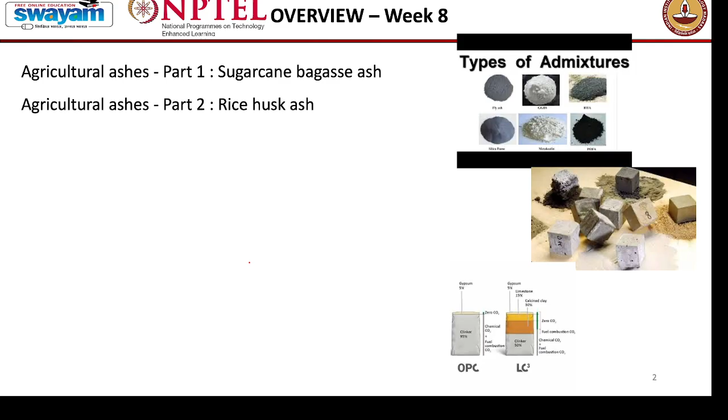We will also assess some properties of rice husk ash and their microstructural properties, and how they influence cement hydration. Then we will see some results from calorimetry, analyze the pore solution from this assay, and study CASH analysis in blended systems along with life cycle assessment analysis.

We will also see how these ashes make cement eco-friendly or reduce embedded CO2, and further study the life cycle assessment of concrete.

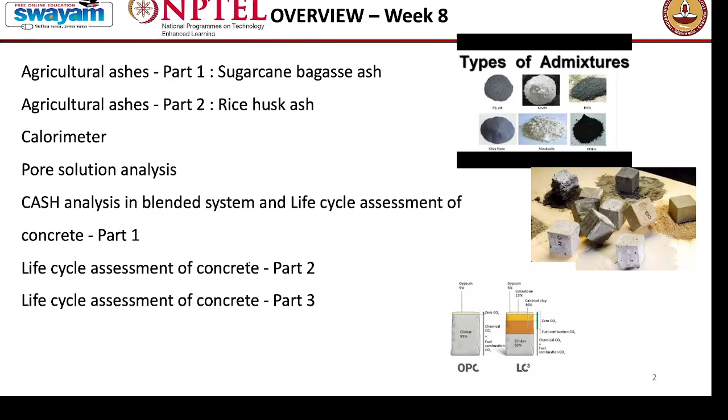Going forward, question number one: which process most contributes to CO2 emission in modern cement manufacturing? This is asked because we want to study life cycle cost analysis, and we know cement produces 8% of CO2 emission worldwide. But what is unavoidable, and what leads to the maximum contribution of CO2 emission from cement?

The first option is raw material transport, because transportation requires heavy vehicles which generate CO2 from their exhaust, needed in abundance to transport materials like clays and limestone to the cement plant.

The second option is clinker formation itself. After taking the raw material and feeding it to the clinkering process, calcination takes place at elevated temperature, which increases CO2, or alternatively it could be cement milling.

After clinkerization, we mill it to make it fine. Obviously more energy is required to mill it into a very fine material. So option C is cement milling.

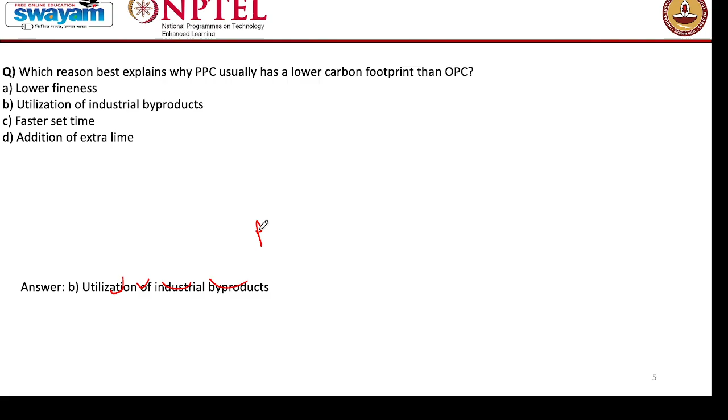Anyone with the answer? Let's see. The answer is utilization of industrial byproduct. As you know, PPC is made up of fly ash, and fly ash is a byproduct from thermal power plants, so we can consider its CO2 footprint as zero.

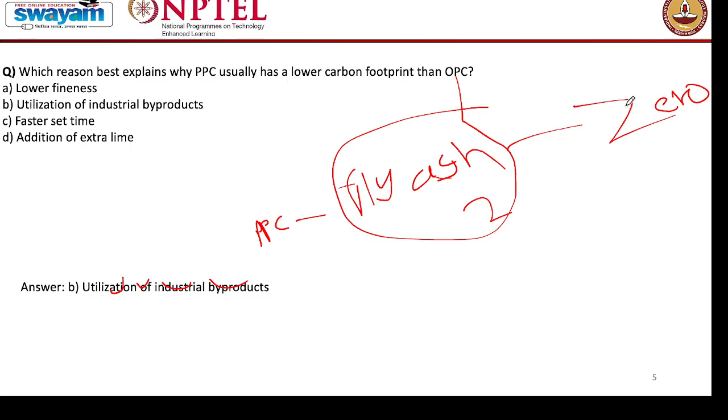So as we know, fly ash is the byproduct from thermal power plant which has zero CO2 footprint. When we use it in the OPC system to make PPC, the CO2 footprint is reduced because we are replacing part of the OPC with fly ash, whose CO2 footprint we consider as zero. Some CO2 footprint will still be associated with transporting the fly ash from the thermal power plant to a cement plant or grinding plant, but that will not be much. Hence, the main reason which best explains why PPC usually has a lower carbon footprint than OPC is utilization of industrial byproduct.

Okay, rice husk ash. Why does the porous silica structure result in a high surface area? The options are: enhanced crystalline phases, traps heavy metals, maintains porosity even in the coarser grains, increases alkali content.

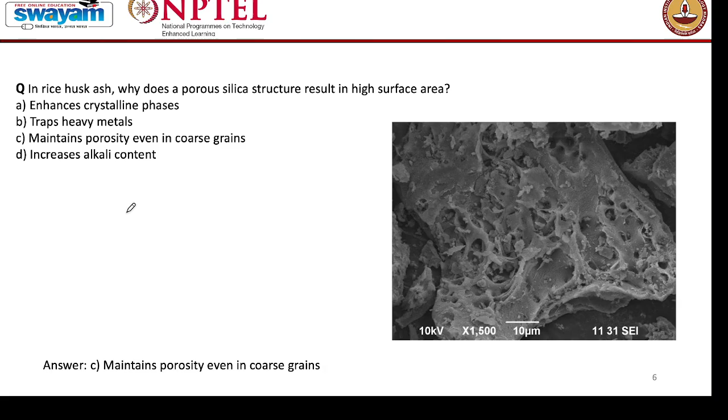So the porous structure leads to high surface area - why? Let's see the answer. It maintains porosity even at coarser grains. They're asking why the porous silica structure results in high surface area.

The property of rice husk ash is having porous structure. Because of porous structures present even in the coarser grains, the overall surface area of rice husk ash is of very high magnitude compared to other SCMs. You can see the structure also looks porous, so the surface area increases because there is area inside the structure as well.

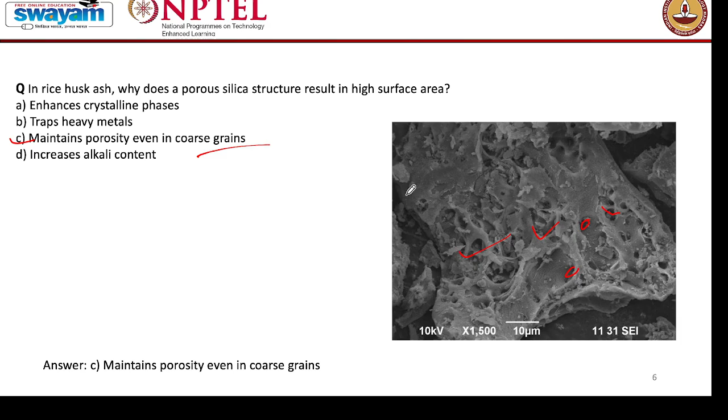Next question: what is the main consequence of excess carbon in SCBA used in cement? What is SCBA? Sugar cane bagasse ash. When we burn the bagasse generated from sugar cane mills, the leftover is ash, called sugar cane bagasse ash. It has some reactivity, so we can use it as a replacement to make cement, right?

Option A: accelerated setting, loss of color, reduced pozzolanic activity, high strength. What is the main consequence of excess carbon in SCBA used in cement? We will also study some of the consequences in the early setting characteristics.

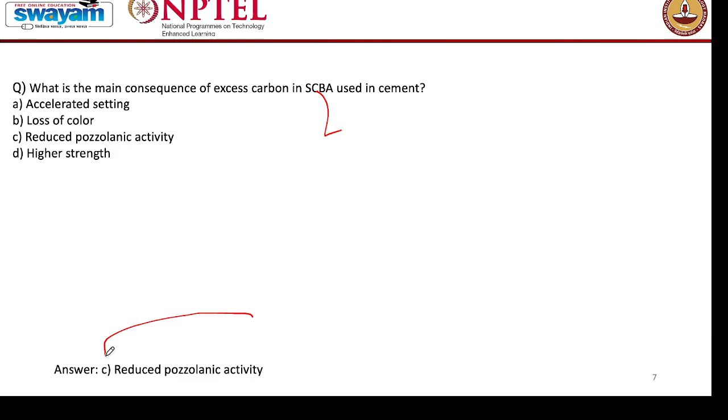Excess carbon means there is more organic compound present, which will hinder some of the early reactivity properties, or even interact with the superplasticizers we use, which could finally reduce pozzolanic activity. Because there is no reactive silica present and mostly excess carbon, it could hinder the pozzolanic activity and we will not get the desired strength.

The next question: which test monitors the cement setting by identifying the heat release during hydration? This is easy, will not take much time. Options: isothermal calorimetry, Le Chatelier, Vicat needle, Blaine fineness.

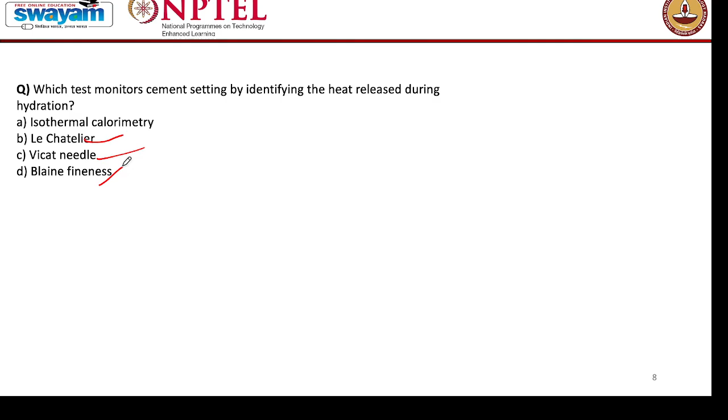Obviously, everyone knows that Vicat needle is used for initial setting and final setting time. Le Chatelier apparatus is used for unsoundness. Blaine fineness is used to calculate the fineness of cement. And isothermal calorimeter is the answer used to identify the heat release during hydration reaction over time.

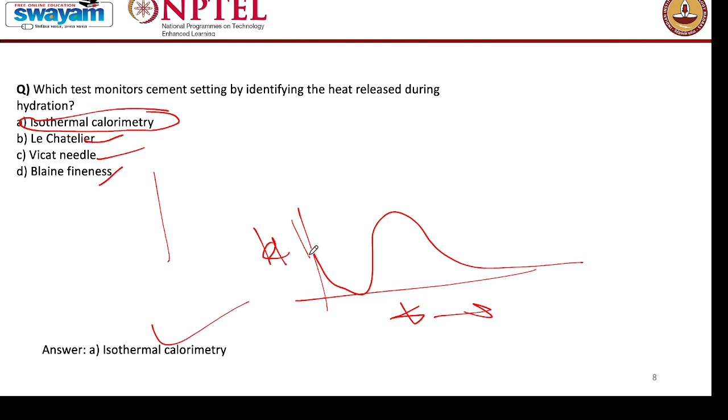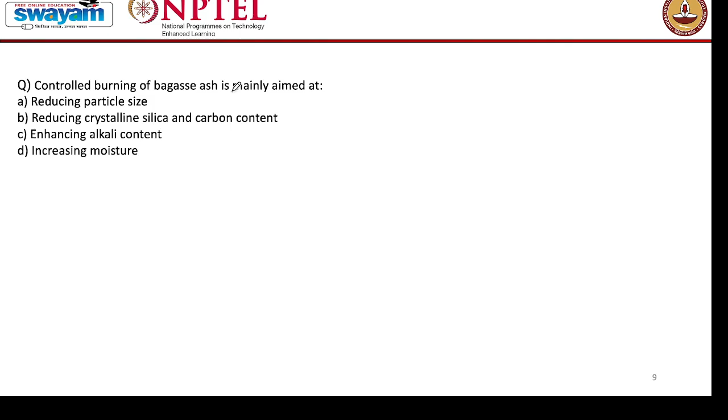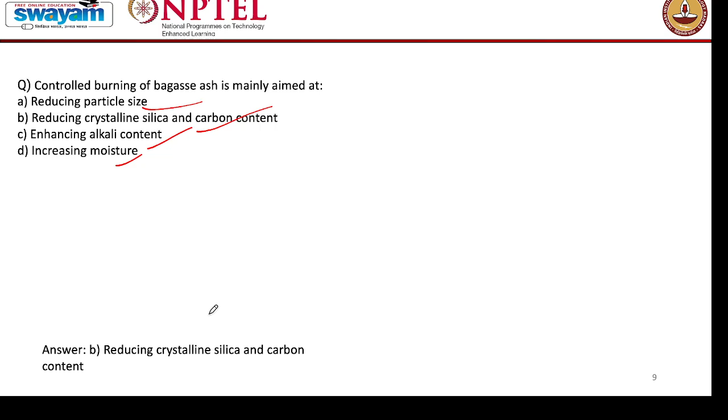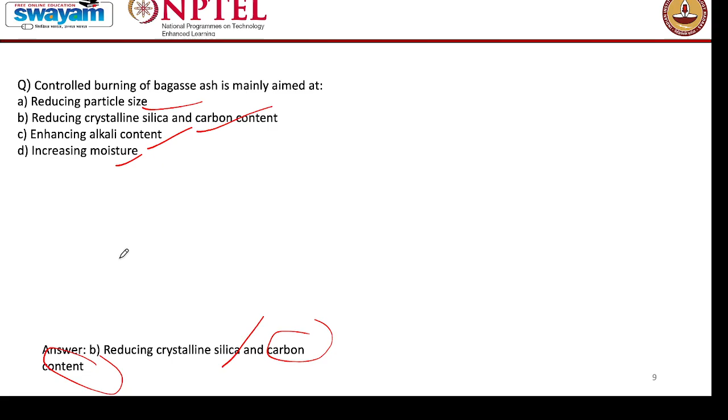So the next question is on why control burning of bagasse ash is mainly aimed at. Just now we said there is a problem of high organic compounds, which is carbon. The options are reducing particle size, reducing crystalline silica and carbon content, enhancing alkali content, or increasing moisture level. The answer is obvious: reducing crystalline silica and carbon content. That way we'll get good bagasse ash for production of concrete using it as an SCM.

What properties primarily limit the rice husk ash replacement level to about 20% in concrete? So there's a limit, why? Rice husk ash we can't use more than 20%. The options are excessive setting time, too much unreacted silica, high water demand, high shrinkage, or low thermal stability. Take your time for this and then we'll move forward to the next question.

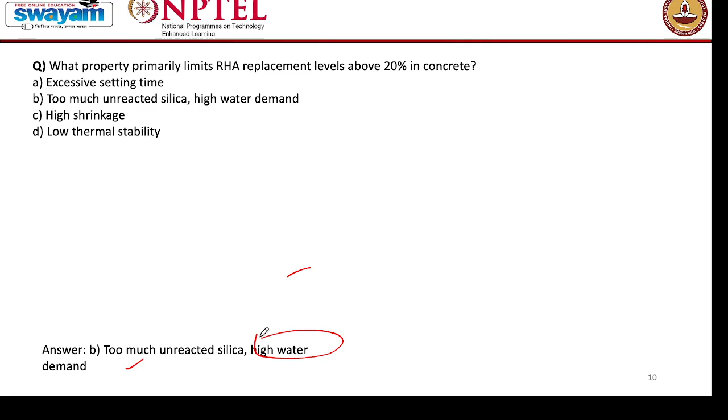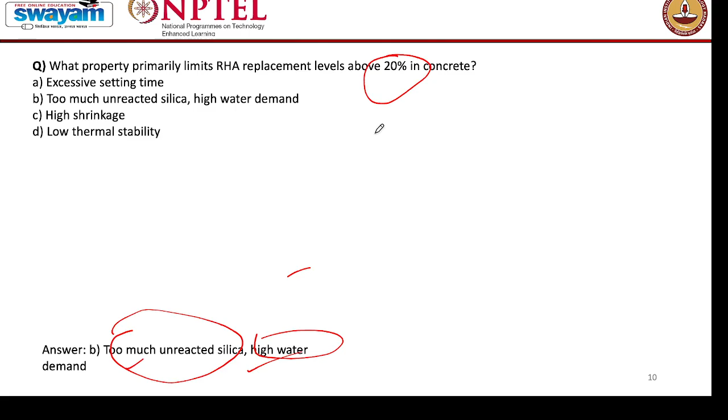Anybody with the answer? Okay let's see. The answer for this question is too much unreacted silica and high water demand, because the fineness and surface area of rice husk ash is very high due to its cellular, porous structure. Because of that there is a high demand of water that can't be met, and too much unreacted silica. That's why we can't use more than 20% in concrete, because it will take too much water.

So what are some sulfate resistant cements which you guys know? Slag-based cements are good in sulfate resistance. Also some of the new cements like CSAB cements and LC3 type of cement also show better resistance against sulfate attack, at least in laboratory testing.

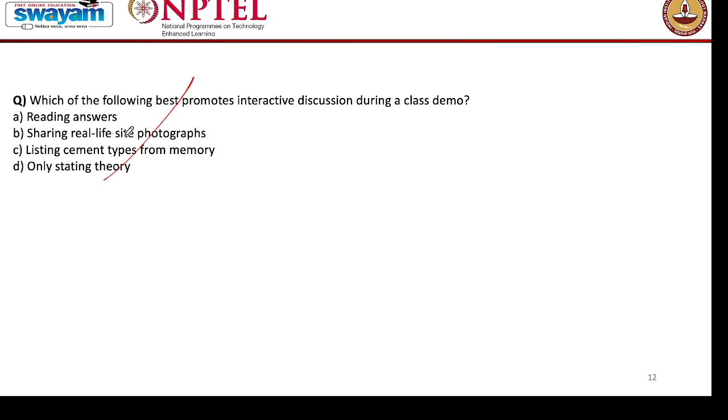The next question is on which one of the following best promotes interactive discussion during the class. Sorry, this is not the question from the content we are studying today.

Next question: which indicator reflects the sustainability of concrete design? Which are those indicators that reflect the sustainability of concrete? Options: apathy index, flashpoint, ratio of C3S to C2S, Blaine number.

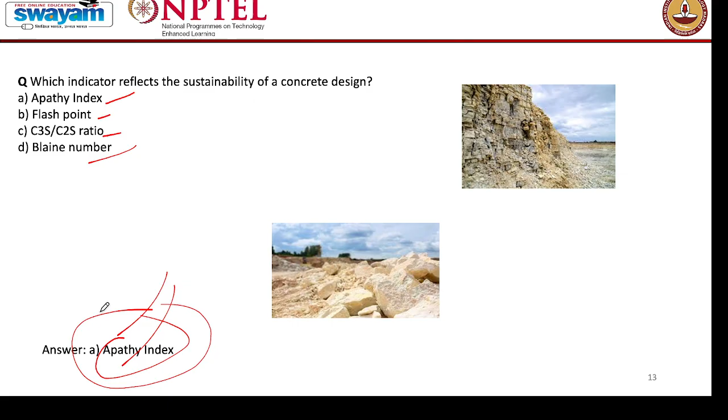This is a little tricky question, so we will not take much time, and we'll study here the apathy index, which determines how much CO2 is emitted per characteristic property with respect to durability or mechanical property. So this defines the sustainability characteristics of the cement. This index is used to characterize the sustainability of concrete, like how much CO2 it is introducing, how much durability it is providing, how much cost is associated, etc.

Next question is on what impact high alkali content in ash has on the cement system. Let's say you have some ash, for example from an industrial power plant or biomass ash coming from agriculture residues. If this has a high amount of alkalis, then what will happen? First option: accelerates the pozzolanic reaction, maybe true, because high alkalinity may create an environment of high reaction which will accelerate the pozzolanic reaction. Increases the risk of alkali aggregate reaction, ASR, could be possible. Improves color, decreases setting time, may also be possible, right?

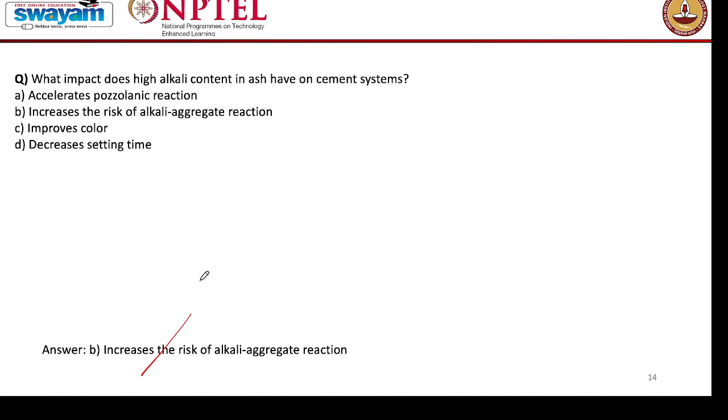But the main disadvantage of having high alkali content is increasing the risk of alkali aggregate reaction. We know that aggregates are not reactive and are inert material in concrete. However, when there is an increase in alkalinity of these binders and in the pore solution, they may react with the aggregate and lead to expansion stresses and bursting. That is not good for concrete, and concrete will have durability issues when there is a high amount of alkalis present. So we should always limit the amount of alkalis coming from the SCMs. How can we do that? There are some SCMs which promote the binding of these alkalis also, or the hydration product.

The nature of hydration product also influences the binding of alkalis, so they will not be easily available to react and form ASR. So we can study those characteristics of alkalis and how they are reacting to the cement concrete.

The next question is on which method best increases reactivity in low grade fly ash for blended cement. Low grade fly ash we want. Which method? Grinding, leaching, washing, blending with calcium sulfate. How to increase the reactivity of fly ash? Let's say you have fly ash with you, or you are using it, but you are not getting much reactivity. You want to increase the reactivity, but you don't want to invest a lot of energy in it.

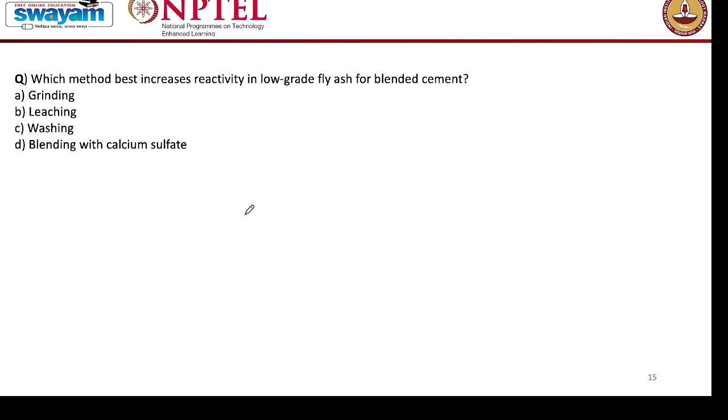We know that the more the surface area, the more the reactivity happens. So how to increase the surface area of fly ash? Can you think in that direction? Yes, of course. If you grind it, that will lead to increase in surface area. More surface area is available for reaction, leading to more hydration product formation, leading to increase in reactivity. Correct.

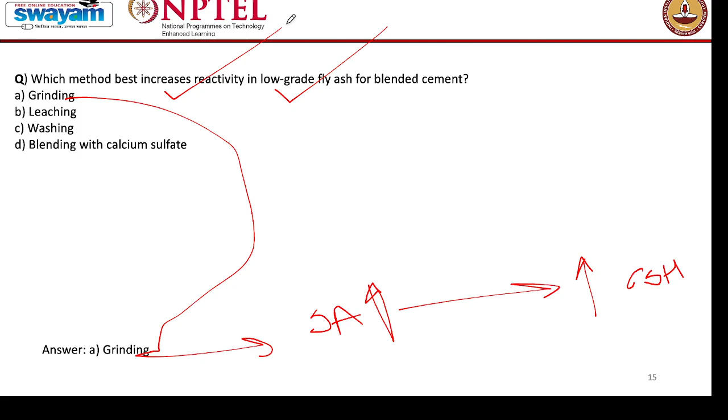The next question is, why does the LOI, loss on ignition, of RHA, which is rice husk ash, rise at very high calcination temperature? You know that there is a temperature limit above which, if you go, there is an increase in loss of ignition. What will happen? What is happening at the high temperature in rice husk ash? And do we need to provide that amount of high temperature? High potassium trapping unburned carbon, more moisture absorption, large particle size, high energy cooling.

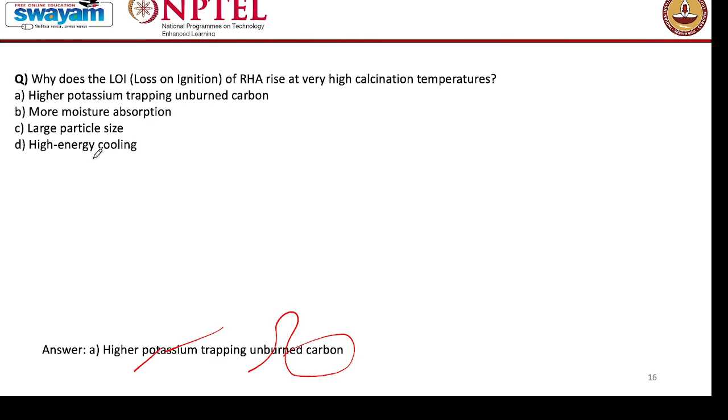Let's see the answer. So at the high elevated temperature, higher potassium is trapped in unburned carbon. That's why there is more loss of ignition. So that is also not desirable, to have a very high temperature, which could lead to very high loss of ignition in RHA.

The next question is, which cement type generally has the lowest embodied energy per tonne? Now everyone should answer this. Which cement type has the lowest embodied energy? Which is the cement that produces the lowest amount of CO2 into the environment? OPC, PSC, PPC, LC3. Take your time.

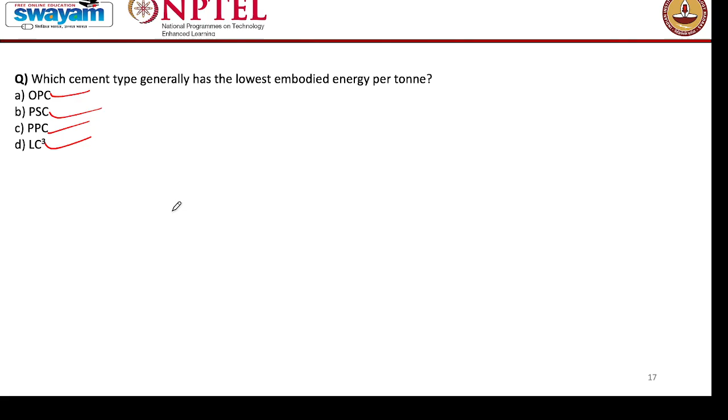Anyone with the answer? Okay, let's try to solve the answer. LC3. Why? Because in LC3 we have 45% replacement of clinker, which reduces the CO2 footprint drastically.

Then there is PSC. PSC also we replace by up to about 50%, which is slag. However, here the temperature requirement for production of LC2 is lower. And then, when we increase the PSC amount, the slag amount more than 50%, the CO2 footprint of PSC will become even less than LC3.

Fly ash is also a similar case. If we increase the amount of fly ash, that will have lower CO2 emission. Because in LC3, for LC2 production, some amount of heat is required, which also generates CO2. That's why this has to be carefully answered. However, the least one will have OPC, because it's using a lot of clinker.

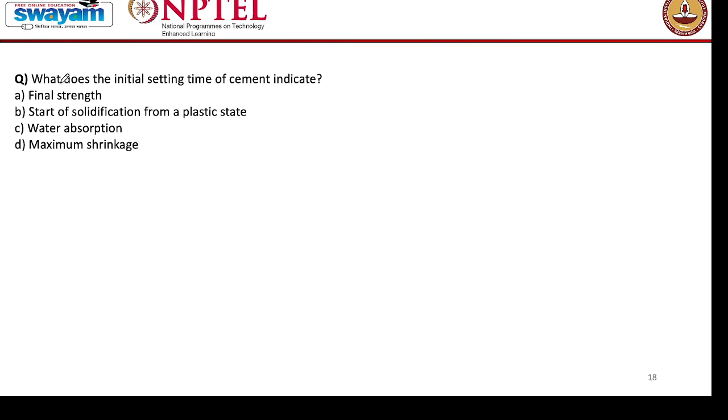Clinker produces CO2. The next question is, what does the initial setting time of cement indicate? Setting time, what does it indicate? Final strength, start of solidification from plastic state, water absorption, maximum shrinkage. This is a very easy question, will not take much time. Start of solidification from plastic state is called initial setting time.

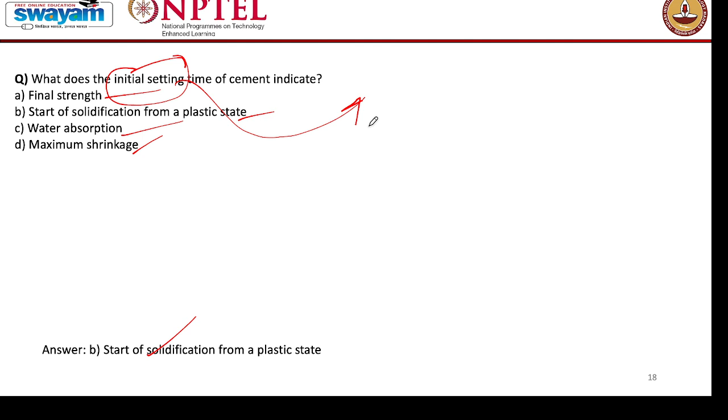Can anybody tell how much is the initial setting time generally for OPC or any type of cement? It's around 30 minutes. And what is the final setting time? Final setting time is around 10 hours.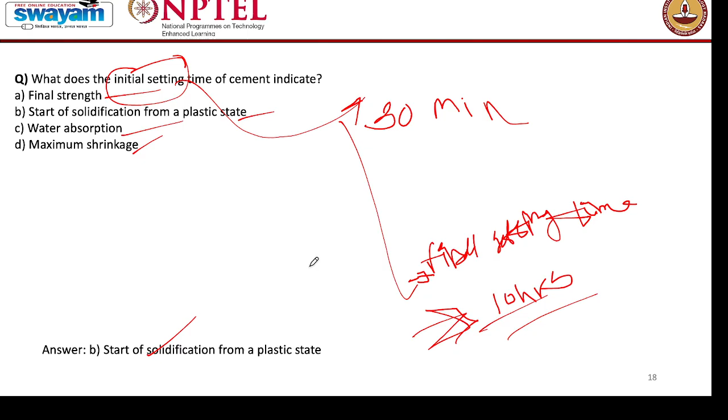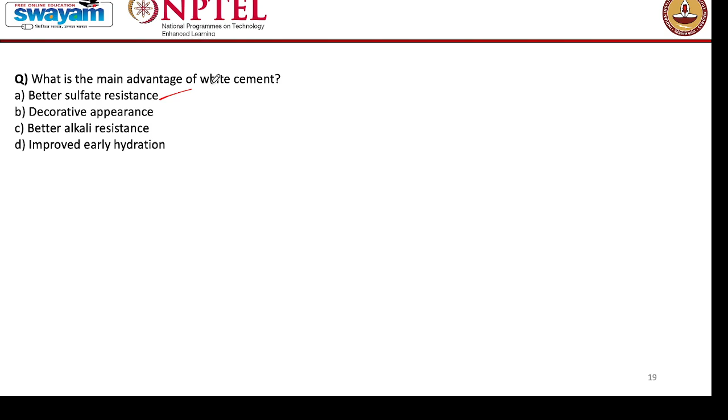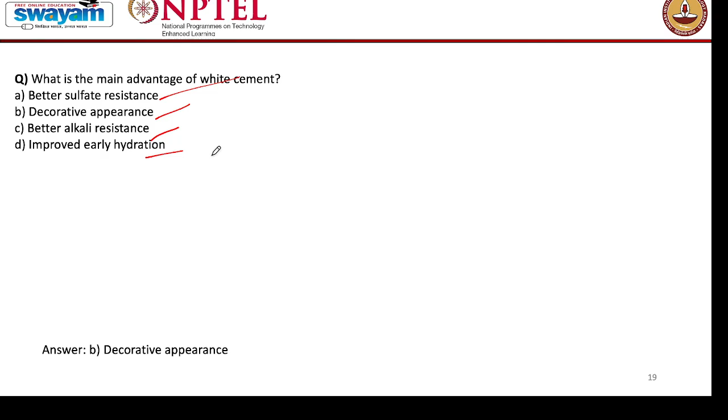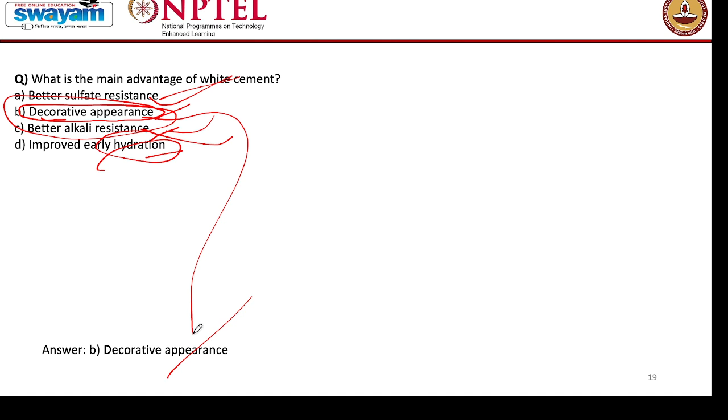The next question is, what is the main advantage of white cement? Why do we use white cement? Why is there a demand for white cement? Better sulfate resistance, decorative appearance, better alkali resistance, improved early hydration. Simple question, will not take much time here. The answer is we use white cement because of its decorative appearance properties. It's not better sulfate resistance, not better alkali resistance, not improved hydration characteristics, but the decorative appearance, where we can use different colors with it. So that is the most important aspect of it.

So for low heat concrete, which type is preferred? Now we want to make a concrete which should have lower heat of hydration. How can we do it? We can use OPC, low heat cement, rapid hardening cement, quick setting cement.

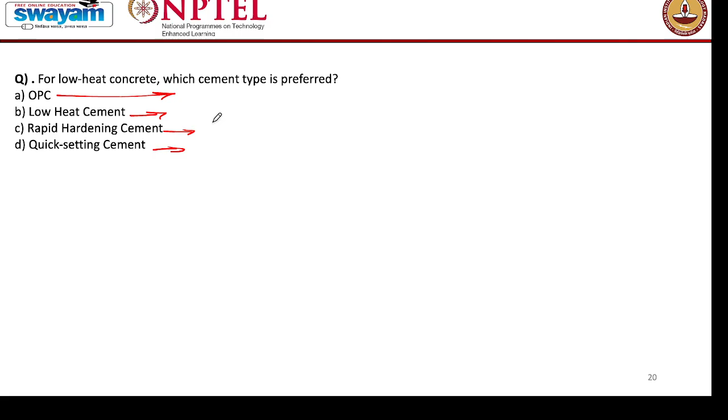I would like you to answer what type of material you will add in a particular amount to make it a low heat concrete. Obviously, the answer is low heat cement. We will use low heat cement to make a low heat concrete. But how we can achieve this is the question.

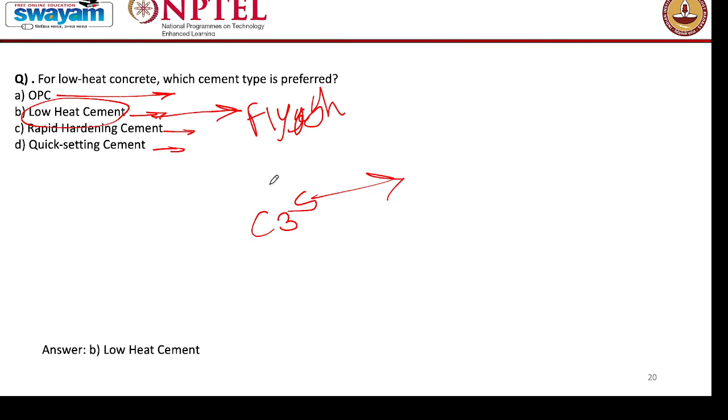Obviously, we will use SCMs in such a way that it reacts and forms more CSH structures. So the use of fly ash is observed to reduce the heat of hydration produced by reaction of C3S, which is very reactive, leading to the initial setting of cement and producing a lot of heat of hydration in the initial stages. To lower that, when we add fly ash, it reacts with calcium hydroxide, the byproduct, leading to formation of further CSH structures, which slows down some of the reactions of C3S and reduces the heat generated. So where will we use this type of cement?

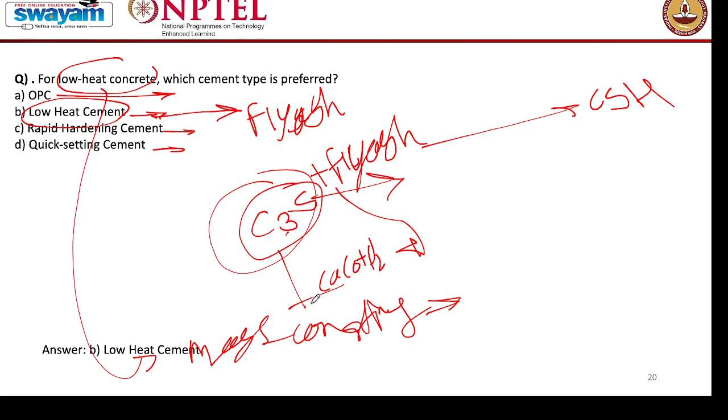Where there is a requirement of low heat concrete, the application is like mass concreting. Where does mass concrete happen? Like very big structures such as rafts of buildings or dams. Dams will have a very high volume of concrete, and because of that it could generate thermal stresses which could lead to cracking. To eliminate that, we go for using SCMs like fly ash, which reduces the heat of hydration in the early stage.

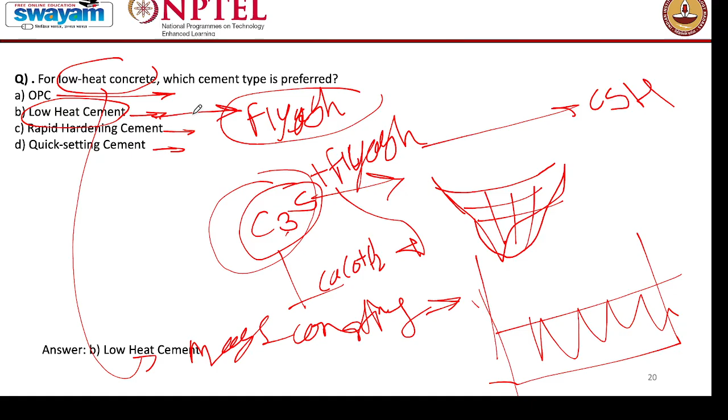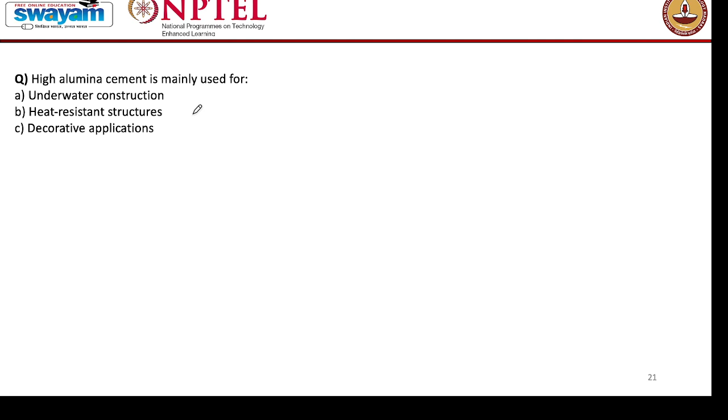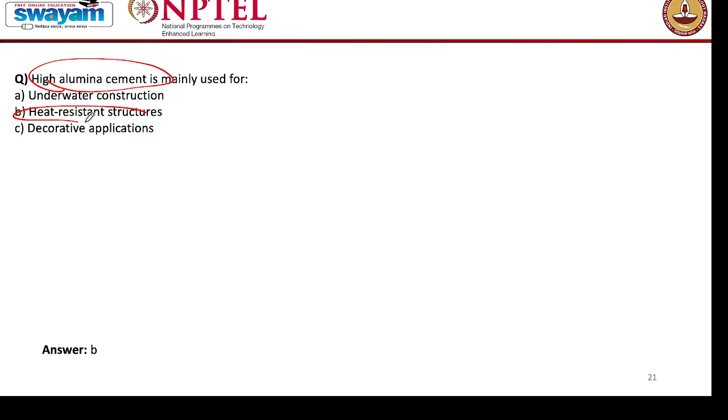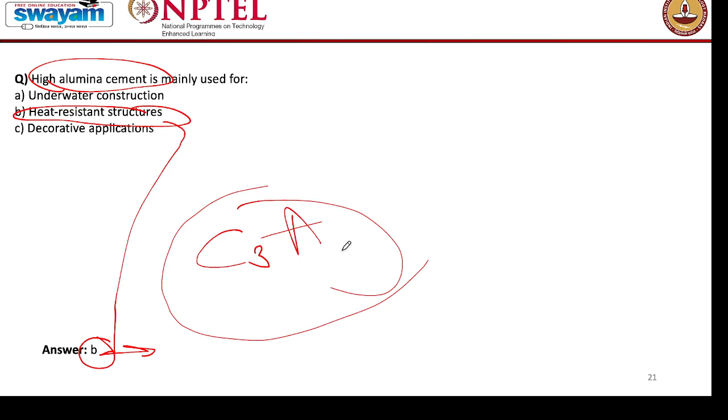Next question is on where high alumina cement is mainly used. Simple question: underwater construction, heat resistant structures, or decorative application? The high amount of alumina is also called refractory type concrete, used at heat resistant structures, for example furnaces, where the temperature goes very high. That's where high alumina cement is used.

Let's move to the next question. What happens if gypsum is omitted from cement manufacturing? As we know, in cement manufacturing the last step is grinding, and after that we add gypsum and grind it again to make it finer. What if we eliminate the last process of gypsum addition? Will concrete become more strong, or will flash set happen? Could improved workability be possible, or early shrinkage?

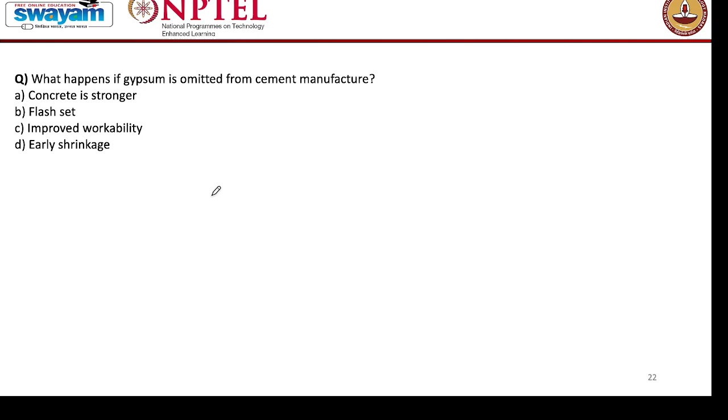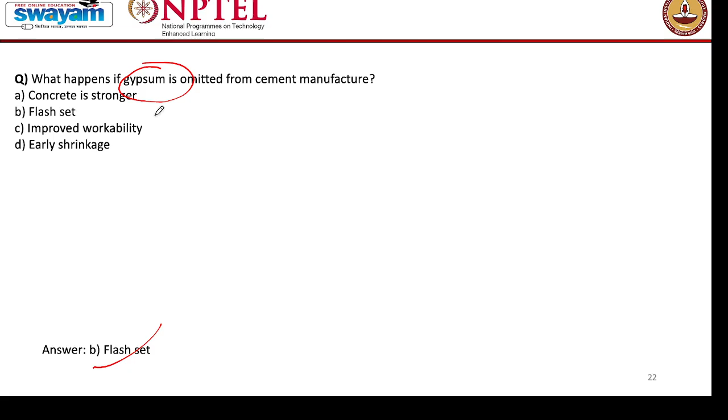So the answer is very easy: flash set. If you don't have gypsum in cement, the reactions of other compounds are too fast, which could lead to formation of a flash set, because they will react very fast and there will be no space to further react, leading to flash set. To prevent that, gypsum is added, which promotes the formation of ettringite, and slowly there is development of strength, reducing the possibility of flash set. So gypsum is also important.

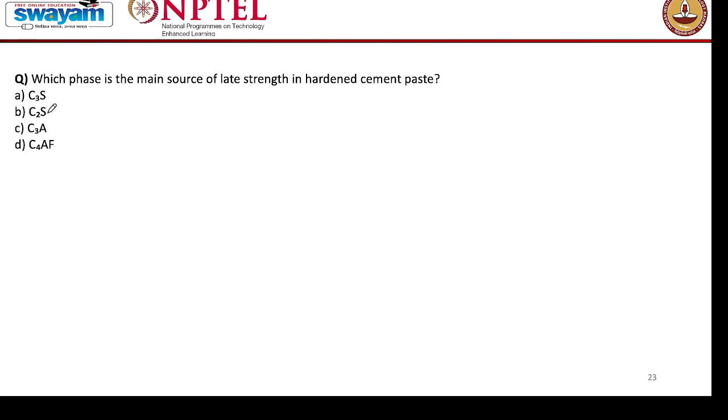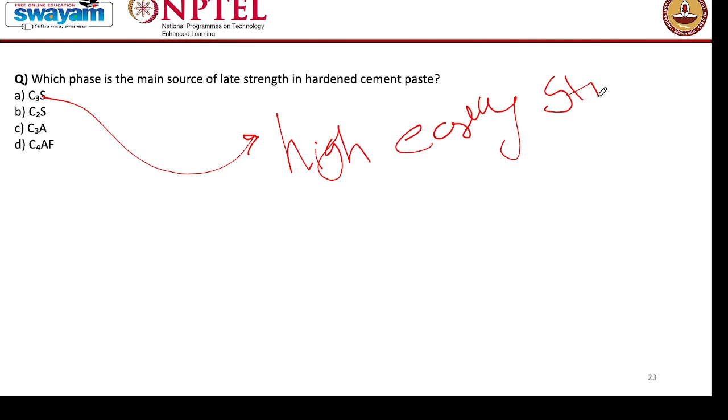The next question is: which phase is the main source of late strength in hardened cement paste? As we've seen, C3S is responsible for high early strength. What compound is responsible for late strength in hardened cement? Like after many years we get that strength, which is the slowly reacting compound, C2S, which leads to increase in ultimate strength at the later age.

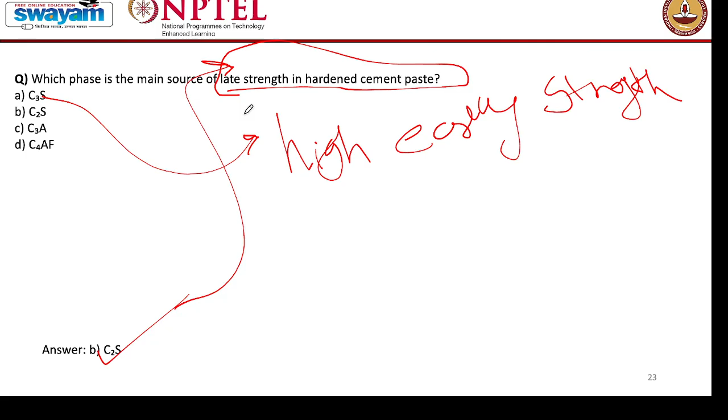It also produces low heat of hydration. That's why this type of cement should be used for mass concreting, dam construction, where there is a requirement of reduction in the heat of hydration.

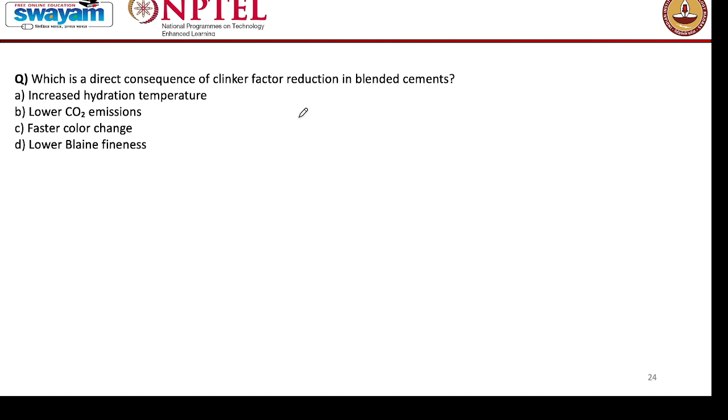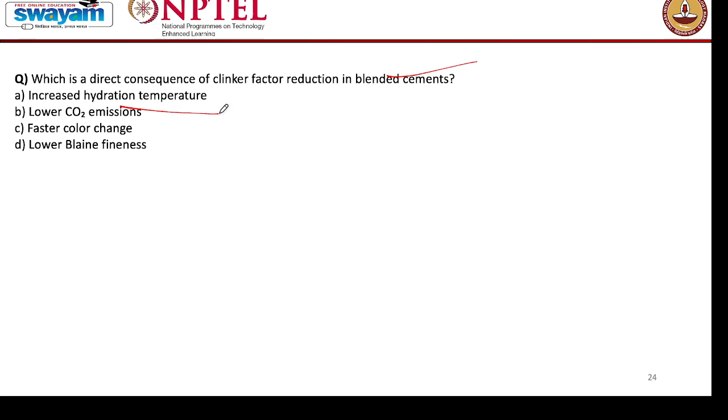Next question is on which is the direct consequence of clinker factor reduction in blended cement. In blended cement, we use different types of SCMs. What will happen? Increase in hydration temperature, lowering of CO2, faster color change, or lower Blaine fineness? What is the direct impact?

Obviously, the direct impact is that it reduces CO2 emission, because we are reducing the most CO2-producing element from the cement, which is clinker. Because of that, different types of blends are used, which are fly ash, slag, silica fume, rice husk ash, bagasse ash, as we have studied, and also the new type of cement called LC3, limestone calcined clay.

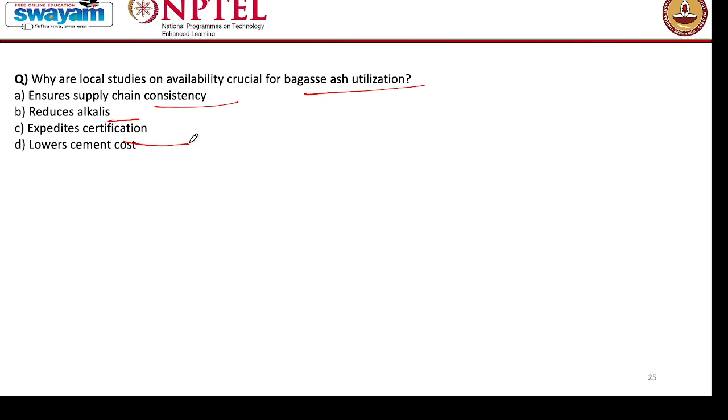So by that way, we are eliminating the use of clinker. The next question is on why local studies on availability are crucial for bagasse ash utilization. Local studies are important for bagasse ash utilization.

Why is it important? Because it ensures supply chain consistency, reduces alkalis, expedites certification, and lowers cement cost. We require consistency in the production of sugarcane bagasse ash, same amount and same nature of silica, and uniformity in production. That's why local studies are important.

So for today's class we have covered different types of cements and SCMs, including sugarcane bagasse ash, fly ash, GGBS, silica fume, and limestone calcined clay. We studied life cycle assessment, which cement produces the highest and lowest CO2 emission, how to reduce heat of hydration, and how to increase reactivity of these cements.

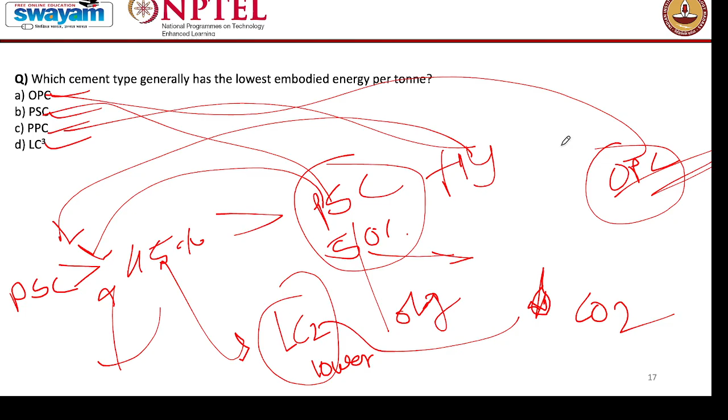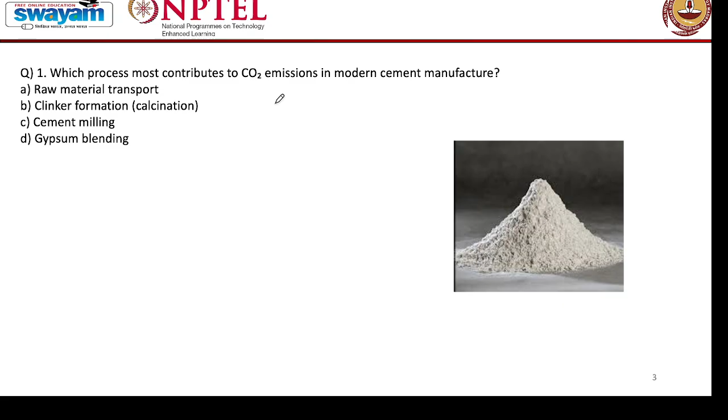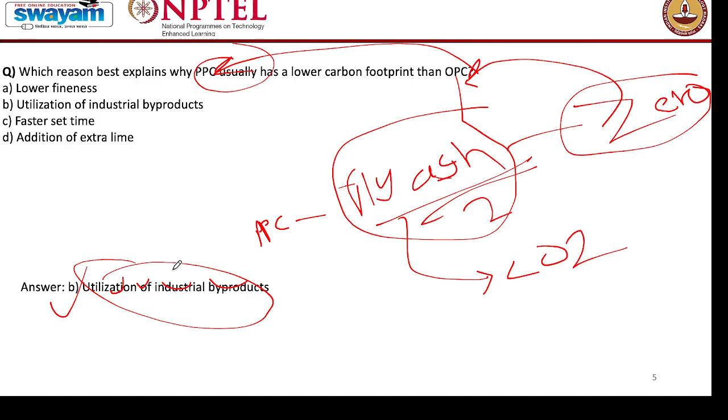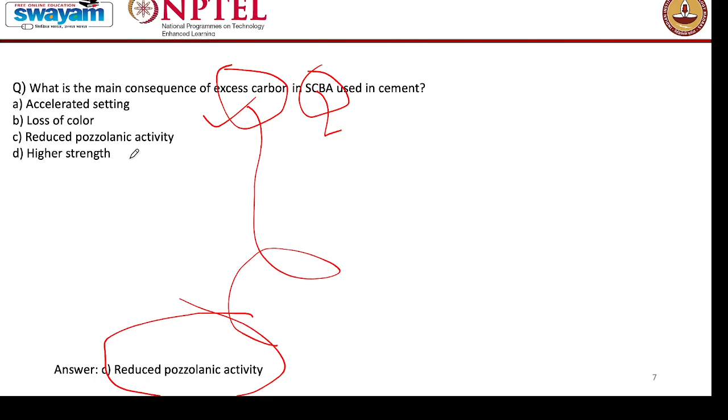Then we studied the reason PPC has a lower carbon footprint, obviously because it utilizes industrial byproducts, so it has low CO2 emission. Then the problem of high surface area of bagasse ash, and why there is excess carbon present in sugarcane bagasse ash, which leads to reduction in pozzolanic activity.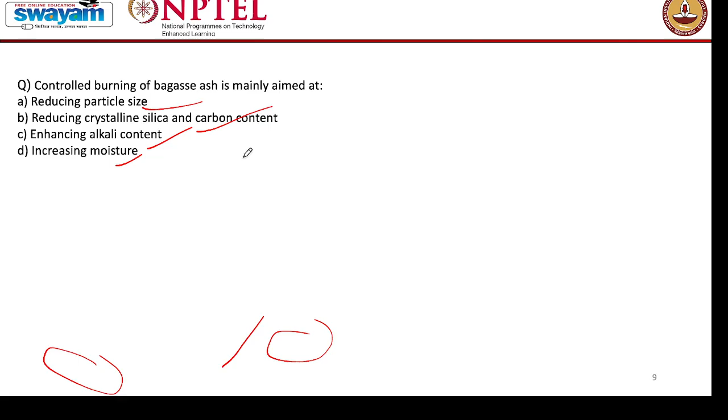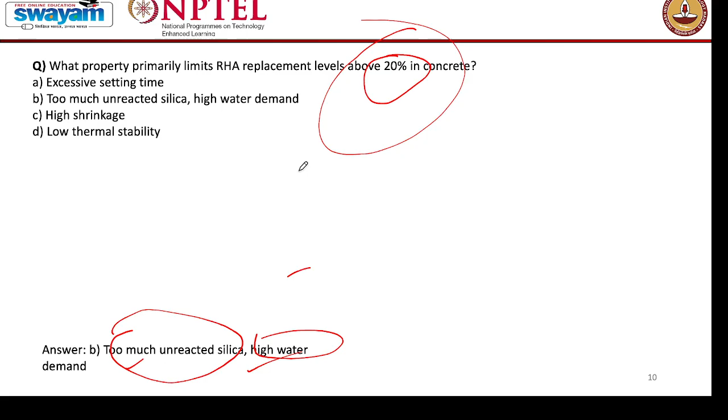Then the test done to identify heat release during initial reaction is calorimetry. We studied that controlled burning reduces crystalline silica and carbon content. We can only use 20% of rice husk ash silica because after that the water demand increases very high. And sulfate resistant cement can be used in marine structures where there is an attack of sulfates from seawater.

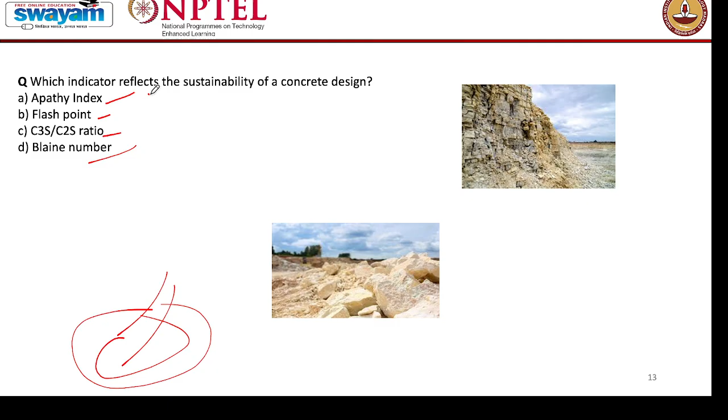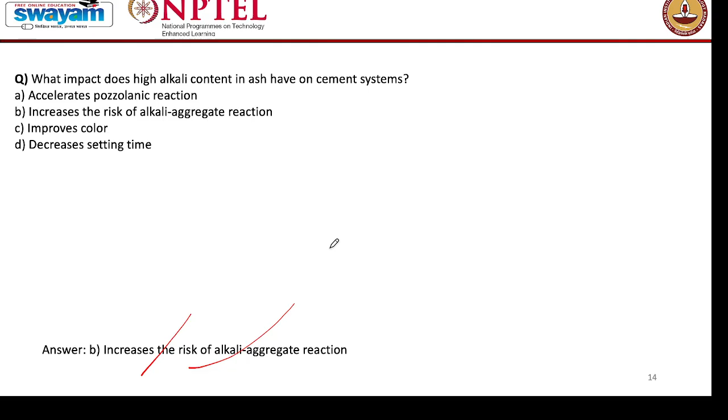Then we studied which indicator reflects sustainability, obviously the apathy index. We studied the impact of high alkalinity in concrete, increasing the risk of alkali aggregate reactions, how to increase reactivity of fly ash by grinding with the least energy, and LOI rises as temperature increases because of higher unburnt carbon.

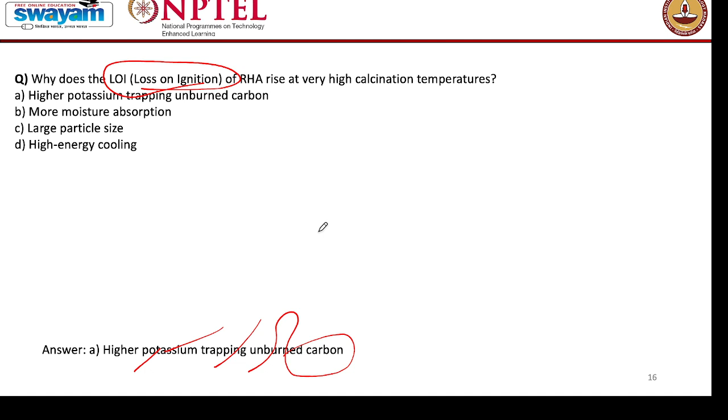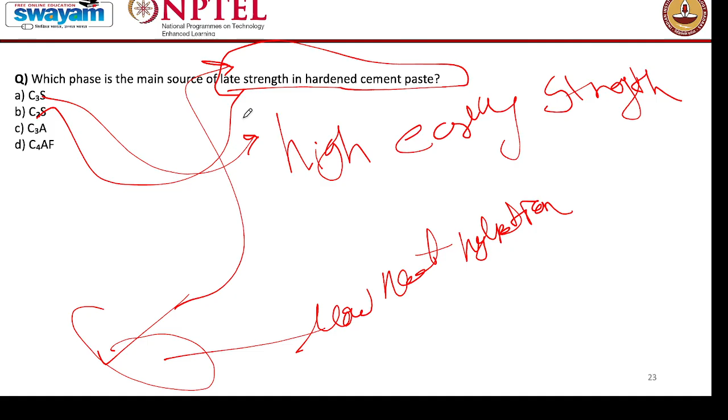White cement is used for decorative appearance. Low heat concrete is generally made from low heat cement, made using SCMs. High alumina cement is used for heat resistant structures at very high elevated temperatures. Gypsum is used to prevent flash set. C2S gives late strength gain of hardened cement.

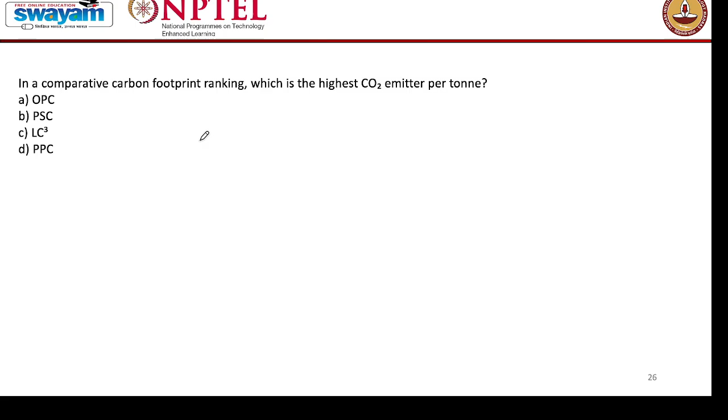The direct consequence of clinker factor reduction is obviously lowering CO2 emissions, and local study is required for bagasse to make it a consistent product. And which has the highest production of CO2? Obviously OPC. Yeah, that's for today's class.